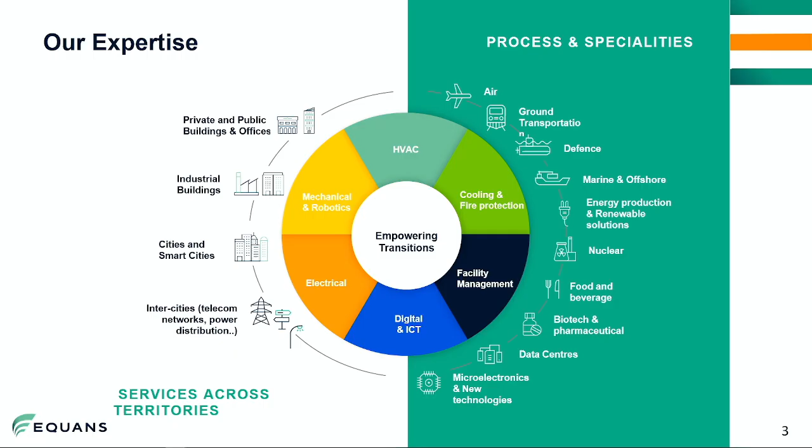As a very quick introduction about what H2Site does, we produce cost-efficient on-site renewable hydrogen for small and medium consumers, both in industry and mobility segments, using what we call feedstock versatile membrane reactors. That's a technology that we have developed together with our partners for the last 15 years, and then we created a spin-off in order to commercialize this technology.

We set out to solve one specific problem related to hydrogen that hasn't been that much of a focus until now, which is the problem of transporting hydrogen. So that's one of the solutions that we have to transport hydrogen efficiently, and that's what we're going to present to you today with Chris.

Originally the technology that we developed was created by two research and development centers, Tecnalia and the Technical University of Eindhoven, that started collaboration with ENGIE about 5 or 6 years ago. Then the company was spun out, and we recently raised Series A with Breakthrough Energy Ventures, Equinor, and an institutional investor.

Before we get onto the project itself, I just wanted to explain why we're doing this project and why would anyone consider ammonia cracking in the first place. As Andreas said, it's sometimes hard to get hydrogen where you need it. There's a disconnect between where we can produce hydrogen and where we want it. Ammonia's properties allow us to overcome some of the challenges that we'd face with other forms of hydrogen production.

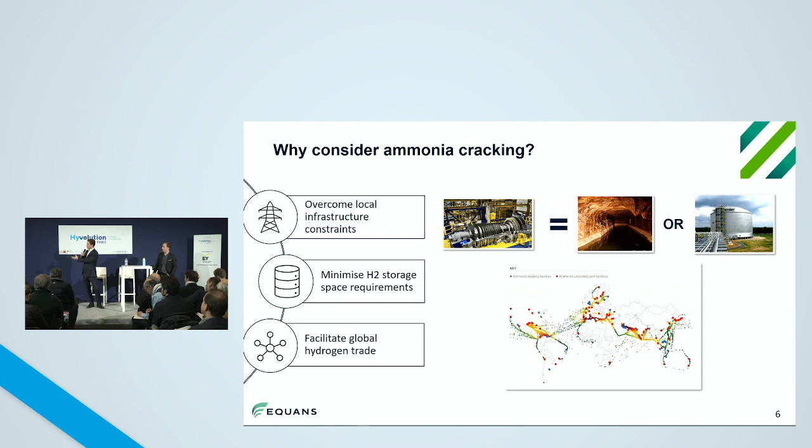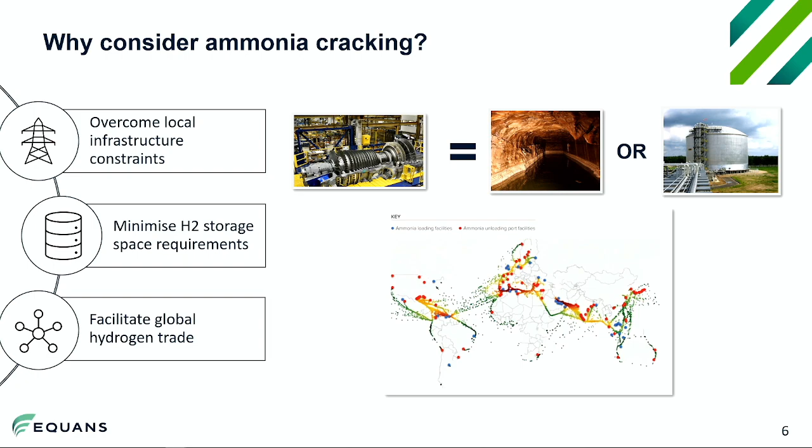And then the third point, probably quite pertinent to everyone here today, is it facilitates global trade of hydrogen. Ammonia is already traded across the Atlantic, across the world today. You can see some of the ports and shipping locations on the screen. And if we're able to reform this ammonia back into hydrogen at the point of use, then we can come up with these international trade deals and bring down the cost of hydrogen on a global scale. So that's why we're doing it.

The next question is, where are we doing it? So we've decided to do it in the Tyseley Energy Park. As you can see on the screen, it's in the Midlands. It's probably about as far away from the sea as you can get in the UK. But it's also a very strategic location. It's about 2.5 miles from Birmingham, the UK's second biggest city. It's about 6 miles from Birmingham International Airport.

And for this reason, it's being designated an energy innovation zone, where there's been lots of investment into decarbonising heat, energy, power, waste, etc. And actually, it's already home to the UK's largest hydrogen refuelling station. Now, although it's the largest hydrogen refuelling station today, it's nowhere near the size that we'll need when the hydrogen economy grows to the size that everyone here is expecting it to. And for that reason, we need to be able to increase the size and the capacity of this site.

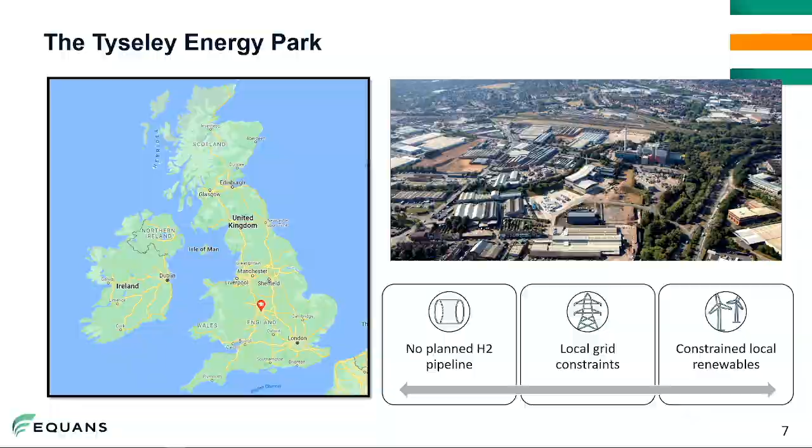But for the reasons that I mentioned earlier, there are some challenges in doing this. There's not enough industrial demand to justify a hydrogen pipeline. We've got a constrained grid, and we've also got constrained local renewables. As you can see, it's a highly dense urban area, so we can't exactly install a couple of wind farms or solar or anything like that. So that meant it was the perfect location, alongside our partners, to come up with this project.

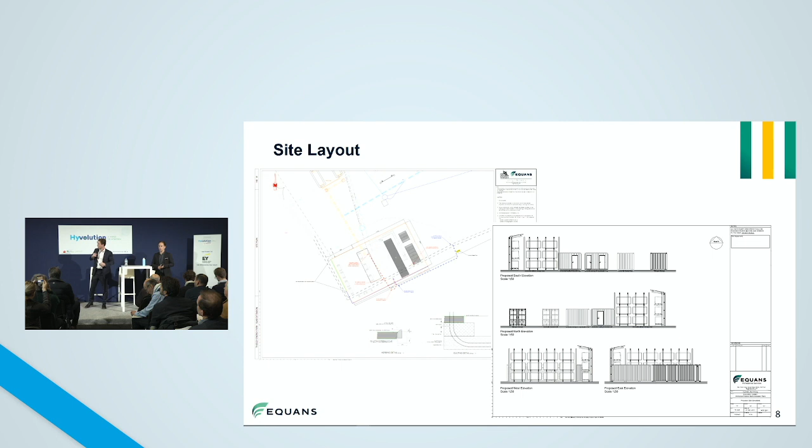There's the refueling station. Now, just to look at the site itself, we've tried to keep it as simple, neat and tidy as possible. In fact, the only civil works required on this project is an extension to the existing concrete slab. So you'll see we're working on the existing park. We're going to build a concrete slab that's aligned at the same gradient as the existing one. We're going to connect to the existing electrical feeder on site, and we're going to install one new water pipeline around the outside.

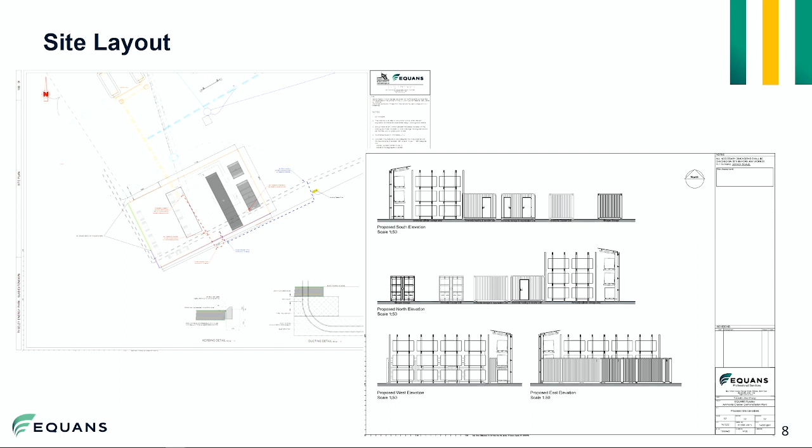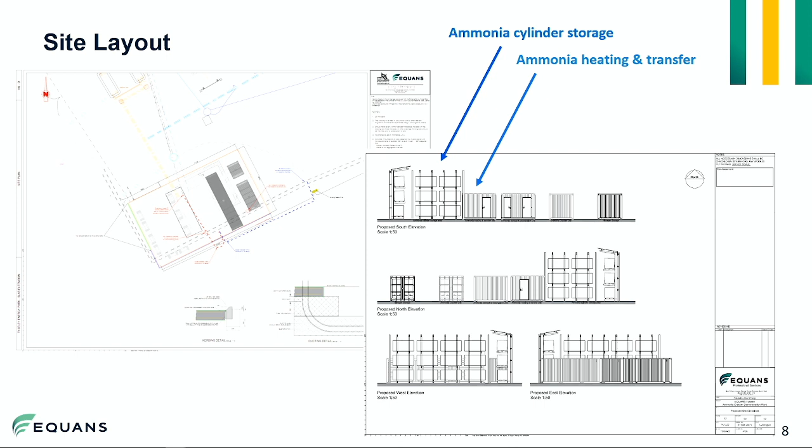And if we think about the overall process of how we get from ammonia to hydrogen, we can run through it in some simple steps. So all of it will be contained in these temporary steel structures that you can see. And the first thing that we'll have is 18 liquid ammonia storage vessels. Each of these contain 530 kilograms of ammonia. From here, we'll have 3 of these vessels loading into the heating and transfer unit.

We'll pass some warm air over the vessels themselves, which will create a pressure differential, allowing it to move into the next stage of vaporization. The ammonia vapor will then pass into Andreas's technology that we'll talk about in a minute, the ammonia cracker. The final element on the site is the nitrogen storage that we'll be using for purging when we start up and shut down the membranes.

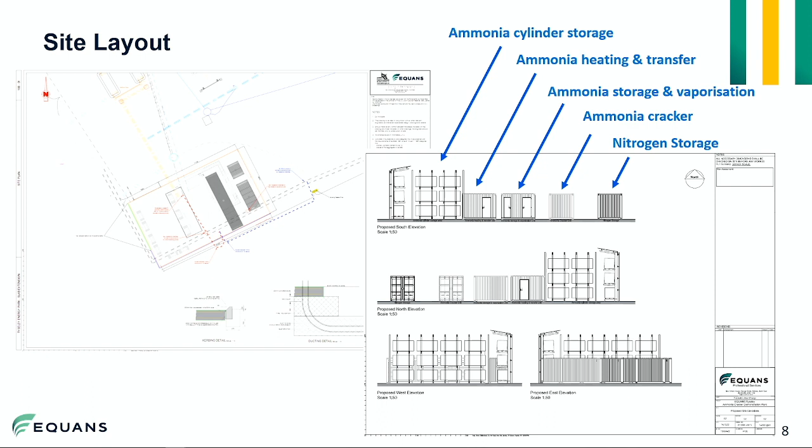So with that in mind, we've got all the planning permission approved on this, and it's raring to go now. Andreas is just going to talk through the technology itself in a bit more detail.

Okay, so as I said, what we have developed is a technology that solves the problem of transporting hydrogen, right? So Chris has introduced this technology that is called the integrated membrane reactor for the ammonia use case. But it can be used with plenty of other carriers. We can crack ethanol, methanol, biogas, formic acid, DME, whatever. So what we like about these molecules is for them to be easy to transport, commoditized in terms of production, and for them to have a regulatory framework that is very well defined. But we treat them all the same.

We take the molecules, we put them into a process column, and this process column contains our key element, which are our membranes. We have a manufacturing site located in the Basque Country in the north of Spain, where we produce these membranes. And these membranes are extremely selective towards hydrogen. That means that whenever they see hydrogen appear, they will absorb it instantly in one single process step, and they will deliver hydrogen at fuel cell purity level. So that is solution number 1, right? The conversion of commoditized hydrogen carriers.

Solution number 2 consists of deblending. There are several geographies, actually like the UK, that are more interested in blending hydrogen into the natural gas network. We do not believe that this hydrogen being burned together with the CH4 makes sense for the purpose of decarbonization. However, if you're able to use existing infrastructure and use a technology to separate the hydrogen at the consumption point to deliver it at fuel cell purity, you can use your same networks to have both methane as a transition fuel and renewable hydrogen.

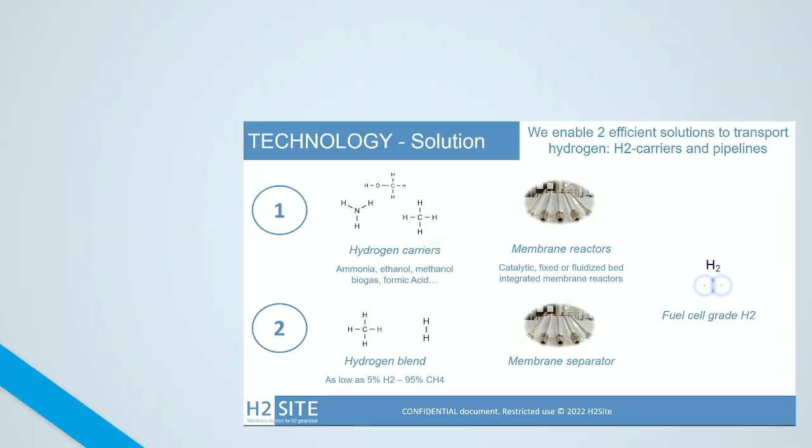So these are the two solutions that we offer today. If we enter a little bit more into detail for the ammonia, today we call it a multi-cracker. We are capable of transforming different locally available feedstocks into fuel cell purity hydrogen. Chris already mentioned that ammonia's infrastructure for storing, transport, handling, and all the ammonia regulations are already available and well-known technologies. Today what we put into this equation is that we convert this ammonia into fuel cell purity hydrogen with efficiencies above 97.5%.

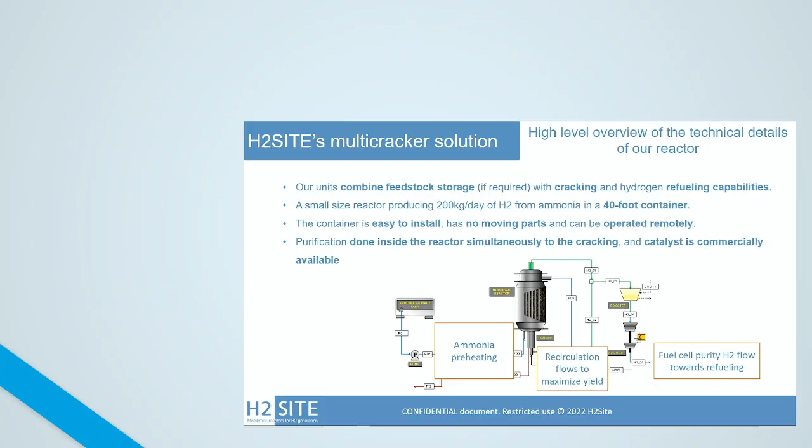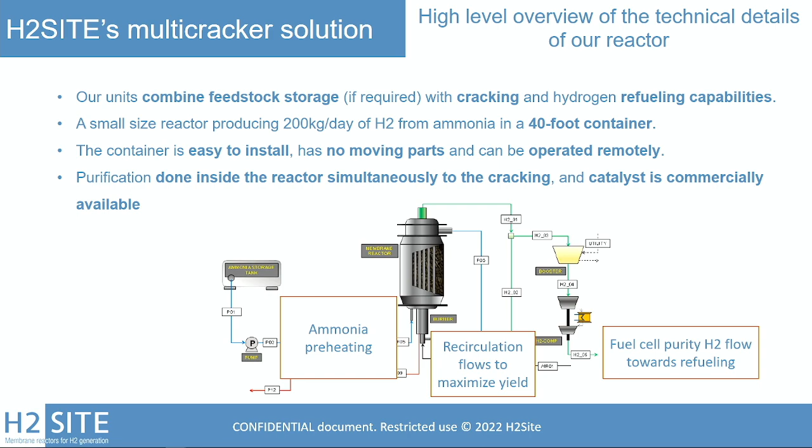How does this work? Everything happens inside this column that you can see there, which is what we call the integrated membrane reactor. The membranes located inside the column are very selective towards hydrogen. So what happens is that the ammonia, the NH3 molecule, converts into N2 plus 3 times H2. The membranes being very selective, as the hydrogen is generated it will be absorbed, and what the reaction sees is that there is a lack of hydrogen, so the ammonia will further want to convert into hydrogen.

That's a principle called Le Chatelier, and it makes the reaction require way less energy than it normally would. Therefore we can operate these reactors at temperatures between 300 and 400 degrees, compared to the 700 to 800 degrees typically seen in the industry. That's the magic - the combination of both the conversion of the molecule and separation of the hydrogen. Everything is installed in a 40-foot container, actually two times 20-foot containers if I remember correctly, and the purification is done simultaneously to the cracking.

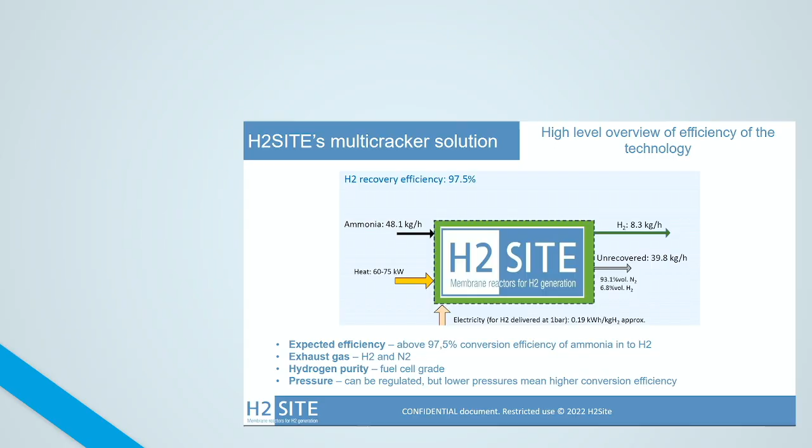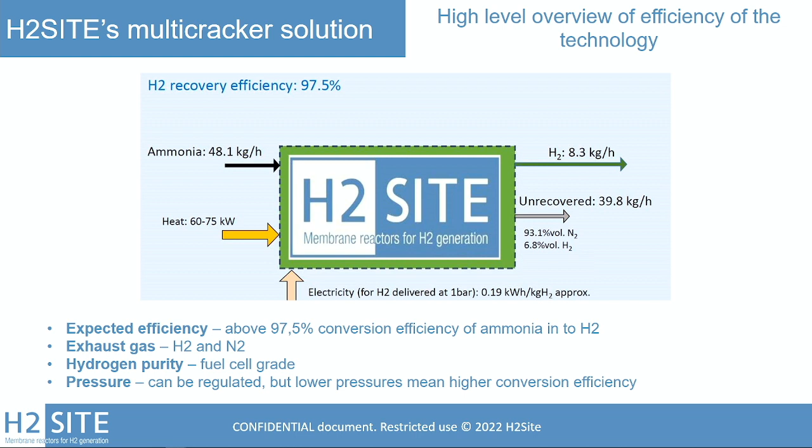So this is the result. All in all, when you take a look at the numbers in the industry right now, you typically need 8 kilograms of ammonia to produce 1 kilogram of hydrogen. Today, with the technology we have, with a company that's a little bit over 2 years old, we manage to produce 1 kilogram of hydrogen with 5.8 kilograms of ammonia. The ammonia being relatively expensive, we believe.

So we believe that the efficiency for those technologies, as well as the footprint that we minimize, will allow us to tackle very different market opportunities, like the one we are building with Chris.

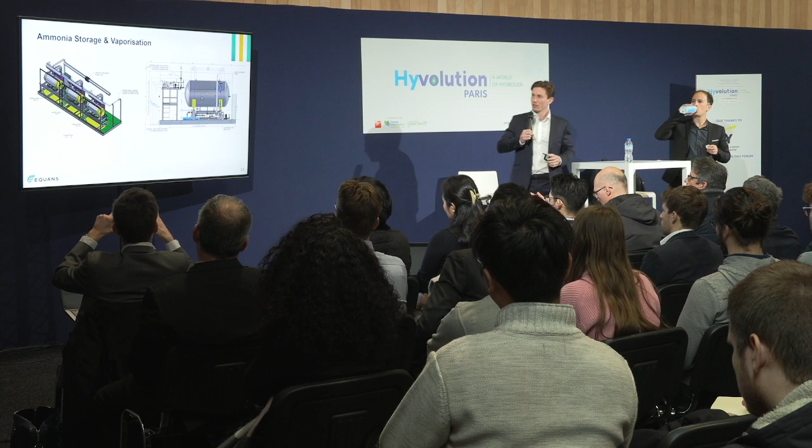Thanks, Andreas. So outside of the clearly very innovative ammonia cracking technology, probably the two most other complicated components as part of this project is the transfer vessel, the one we can see on the right-hand side, where the three ammonia drums are heated, where that pressure differential is created, and which draws the ammonia into the vaporization chamber, also shown on the right-hand side there.

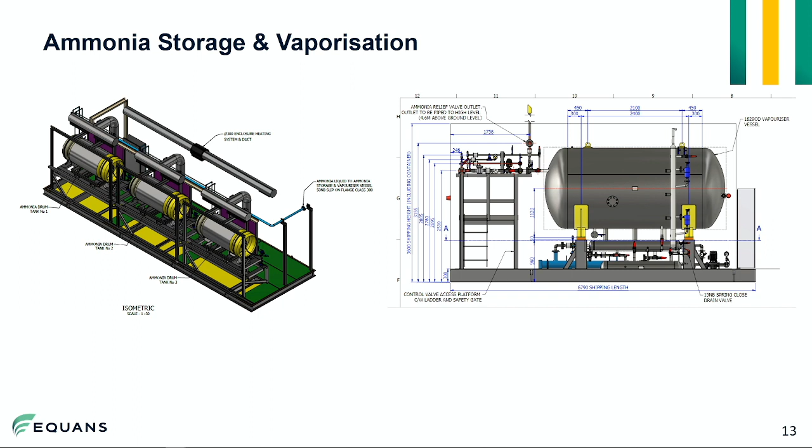Now, clearly, when you're dealing with ammonia you have some additional safety concerns rather than in a pure electrolytic hydrogen production project, and we've had this very much front and center as we've been going through the design phase of this project. As part of our hazard study and wider safety concerns, we've identified all of the key risks and are now pleased that pretty much all of these have either been engineered out or managed out of the project through really robust on-site processes.

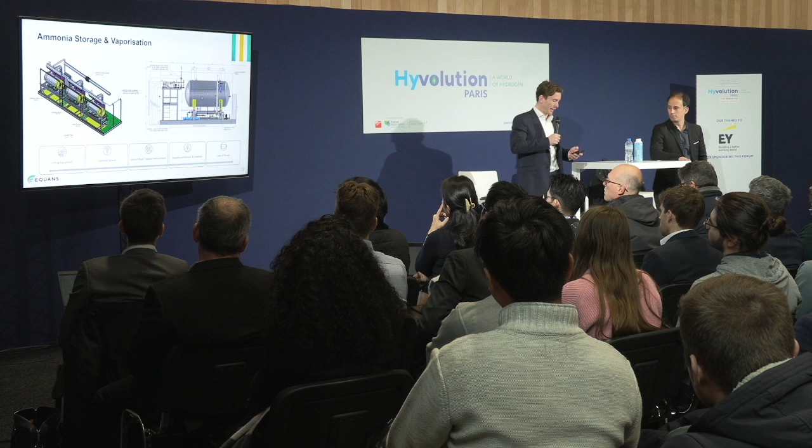So the project is, like I said, ready, raring to go now. In fact, if we look at where we currently are, we are mobilizing today or tomorrow. We're planning to get the keys to the site in the next couple of days and start breaking ground fairly soon. After that, we'll have it built in the first half of this year, and it will be commissioned around June time before operations begin in October.

And obviously through this, we want to demonstrate that we can produce hydrogen in a cost-effective, fuel cell grade purity using this technology. Finally, because this is just an innovation project, we will be decommissioning it in January 2025. So hopefully we'll be able to demonstrate that over that run period, it's something that's got legs in the future.

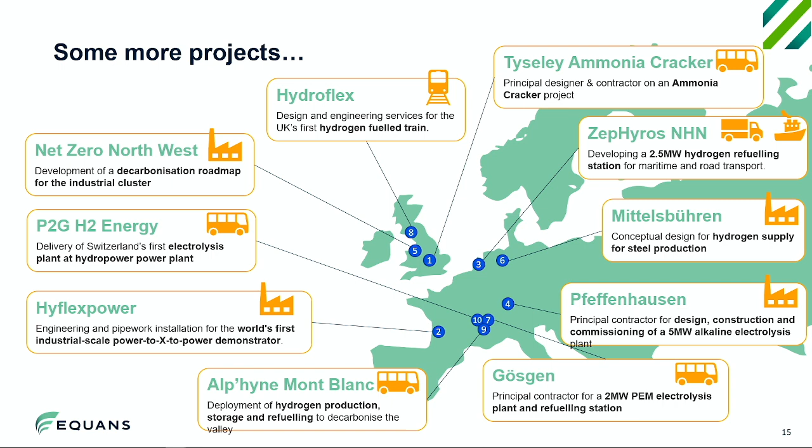We've learned a lot during the design of this process, and it's really encouraging that between us and the other parties in the consortium, we've got to a position now where we're able to actually build this thing. So really encouraging. Outside of that, I just wanted to focus on some of the other things that the joint Equans and Bouygues Energy and Services group are doing. We really have been established to become the new world leader when it comes to actually delivering hydrogen projects, designing, building, operating and maintaining them throughout their life cycle. And these are just some of the projects we've developed across Western Europe.